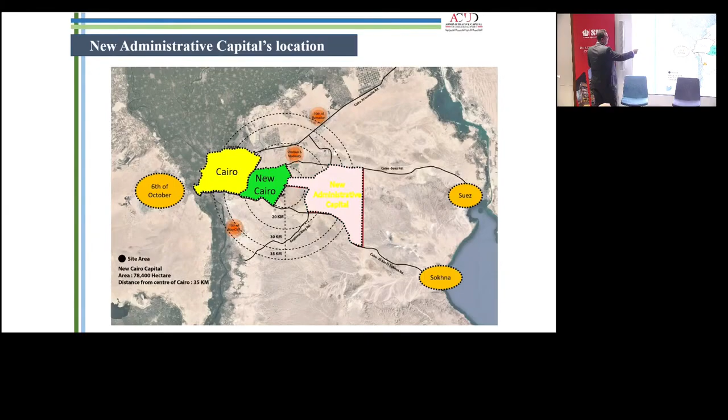So we are showing you the location of the new administrative capital, so you can imagine where it is. Again, the Nile, Cairo, and the green color showing New Cairo, a neighborhood related to Cairo, and after that the new administrative capital.

It's surrounded with a network of roads, so it's easy to connect and reach the new capital, going back and forth, and it's already connected with the rest of Egypt. This is one of the most important things: when you start a new urban development, you have to connect it with the rest of your country to move the mass of people, workers, and companies there.

Otherwise, you have to establish a network of roads, trains, monorails, and so on. So we can see it's connected with the rest of Egypt and Cairo. We have three ring roads around Cairo: this one, the other one, and the last one. We have the old one, and we have here what we call it.

Here we have a ring road, and another ring road here, which we call the middle ring road, and here we have what we call the regional ring road. So it's connected with the rest of Egypt.

What about the space? How much bigger is the new administrative capital? We are talking about, when we finish, by 2050, about 6 million people. We are suffering in Cairo—we have more than 12 or 13 million people living there. Hopefully we can move a massive number of these people to the new administrative capital, also from the rest of Egypt.

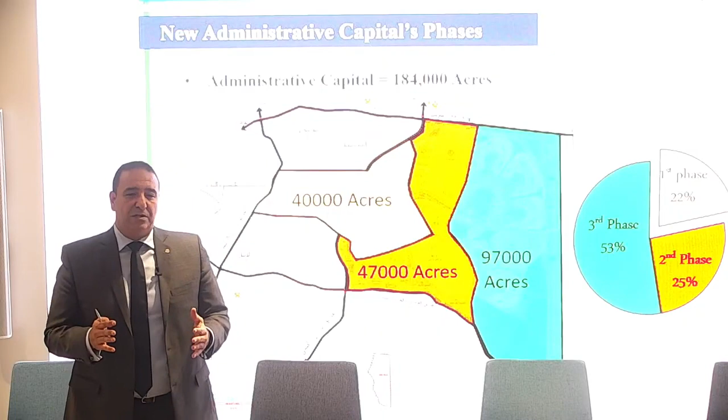In Egypt, we have almost 500,000 up to 600,000 marriages every year, and all of these need housing units. We need housing units, and this is also one of our reasons to establish this project.

Again, we have here the new Cairo neighborhood, the middle ring road, the regional ring road, and the new administrative capital.

When we talk with a consultant, of course we have a layout, engineers, and consultants in every field—electricity, water, general consulting. They advised us strongly that we had to divide the project, because we are talking about a total space of more than 700 square kilometers.

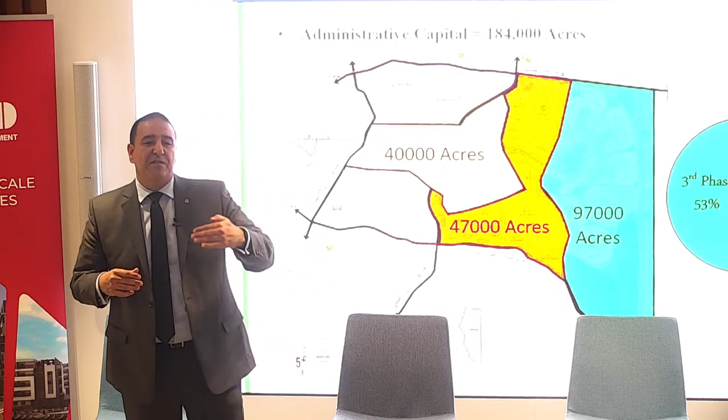In Egypt, some use acre or feddan as a measure. With acres, we are talking about more than 180,000 acres, equal to more than about 730 square kilometers. Actually, it's bigger than Singapore, for example.

So this is a very huge project. They advised us that we had to divide it into phases, because it's difficult to finance the whole project in one shot, and it's also difficult to start technically with this much space.

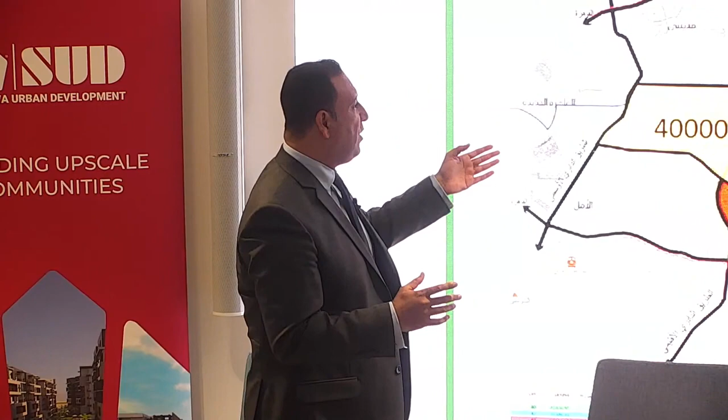So we divided our project. They also advised us to put some anchors in the first phase to attract all segments and make the project a success.

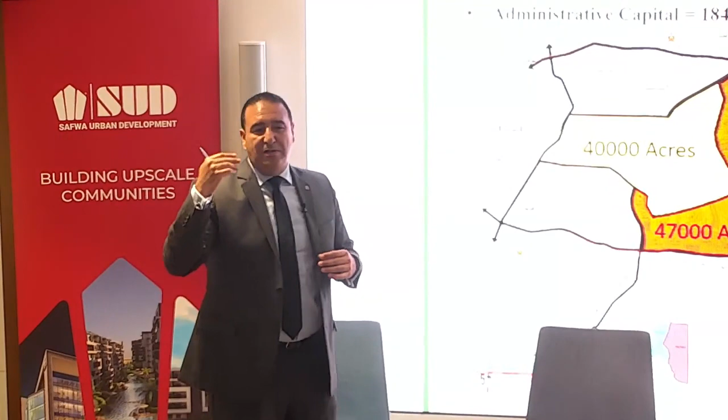You can attract a segment of residential, with people seeking housing units. You can attract companies. You can even attract people interested in culture and business.

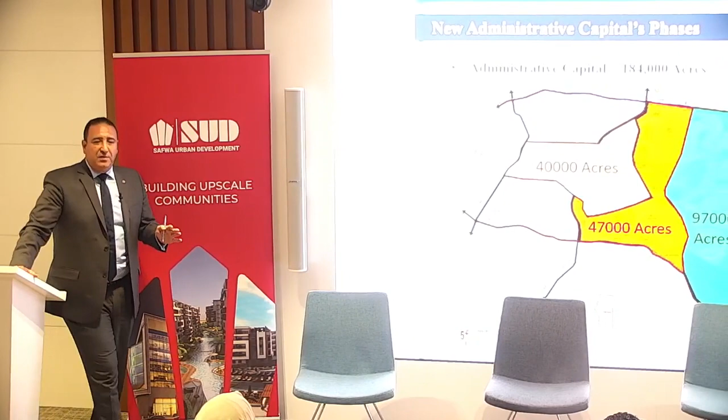Actually, the announcement about the new capital was in March 2015, and on the ground we started almost a year later, because we had a lot of studies to finish before starting. Now we're talking about 5 years—5 years on the ground, 5 years with 40,000 acres. It's a very huge space, and we believe we've achieved a lot.

And you can notice that when we finish our presentation and when you see the video.

We're talking about the connected project. We have here the Middle Ring Road, the New Cairo neighborhood with the 90th Road, and the Middle Ring Road and the Regional Ring Road, and Cairo Suez at the southern part is connected with Cairo Suez Road, Cairo Sokhna Road, and Cairo Suez, the red one. It means it's already connected.

It's near what we call Mustaqbal City, or Future City, and Madinaty. If you've been to Egypt before, you may know that. And it's almost connected with the old urban area.

Beside the roads, beside the network, the most important thing for us is to be connected with the rest of Egypt. We are working now through the Ministry of Transport with two means of transportation. It costs a lot, but we've already started and almost finished. We started with what we call the light train. We are dealing with the Chinese on this, and we'll almost finish by the end of this year, maybe the first quarter of next year.

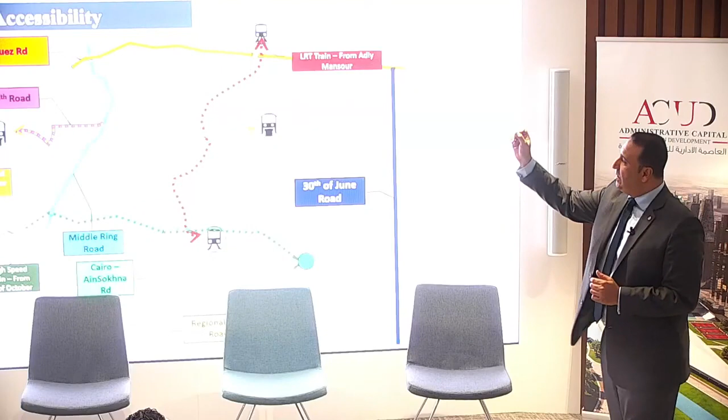Also, the third transportation means: we signed a contract with Siemens, the German company, to establish a fast train coming from a city called Ain Sokhna, located on the Red Sea east of Cairo, to connect east of Egypt, ending in Al-Alamein, located at the north coast. So we will connect the east of Egypt with the north of Egypt via the new administrative capital, which will be the third public means of transportation. So it's very connected with the rest of Egypt.

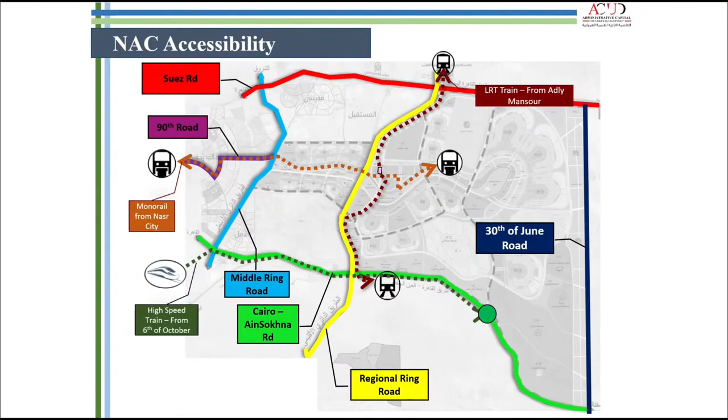This is just to show you that we already received the tracks of the monorail, and we have the routes here, beside the towers. By the end of this year we will finish the monorail and the light train.

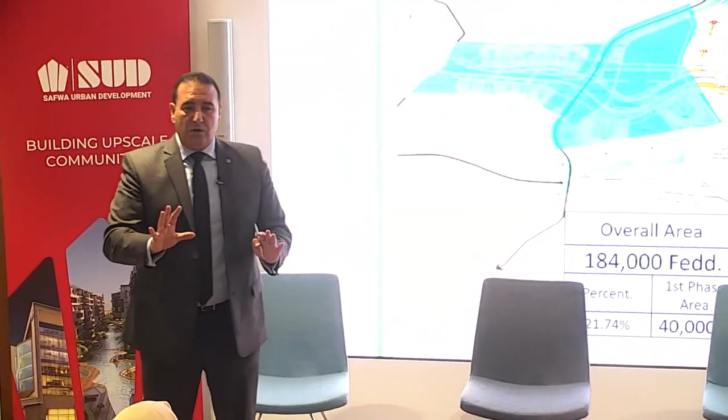Let's talk in depth about the first phase. When you hear something about the new administrative capital in Egypt, you have to know very well that we are talking about the first phase only, the 40,000 acres. We have the layout for the second and third phases, but we actually started with the first phase, beginning 5 years ago as I mentioned, and hopefully we can finish the first phase of 40,000 acres with a huge number of projects.

We have more than 400 projects in this huge space. We are doing something like a miracle. After 2 or 3 years, maybe by the end of 2025 or 2026, we will completely finish the first phase of 40,000 acres with these projects. After that, we intend to start the second phase, then the third phase, to offer Egyptian citizens, by the end of this project, 6 million opportunities to be in a new, urban, modern, and smart city.

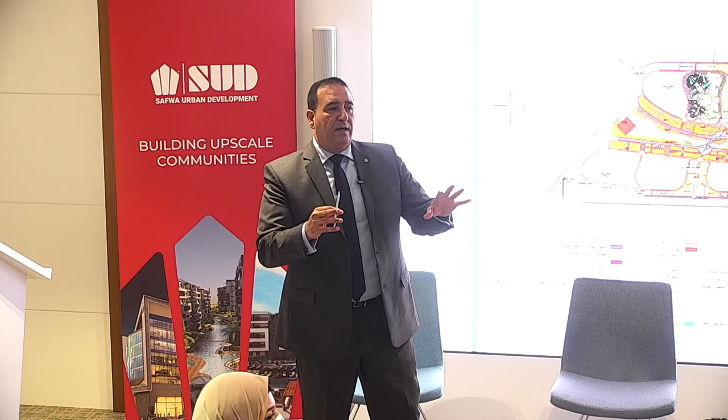Let's talk about the first phase. Do we still remember where the new capital is located? Located east of Cairo, east of Cairo again. You can still remember the map, east of Cairo. By the way, the distance between downtown Cairo, which we consider to be Tahrir Square, and the downtown of the new capital, is about...

...50 kilometers when measured on the map, but actually on the road it's about 70 kilometers. And the distance between the new capital and the eastern border of Egypt, meaning the Suez Canal and Gulf of Suez, is about 100 kilometers. So it's located between the economic zone in the Suez Canal and the ports and the Red Sea, and Cairo. As I mentioned, it's 50 or 70 kilometers by car from here to downtown Cairo, and 100 kilometers from the downtown new capital to the Gulf of Suez and Suez Canal.

Remember the location, this is the layout for the first phase. We have 3 phases, and we started with the first phase 5 years ago. It will take about 3 or 4 more years to finish the first phase.

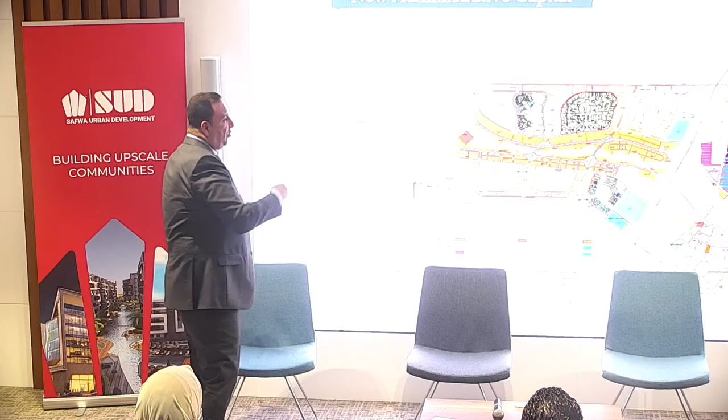We have a layout, but of course we didn't make this ourselves. We have an engineering consultant, and we are dealing with the best, for example Dar al Handasa, a worldwide consultant. We have many consultants, and we pay a lot for them, just for unique design and smart solutions for everything, electricity, water, sewage, and even the design itself.

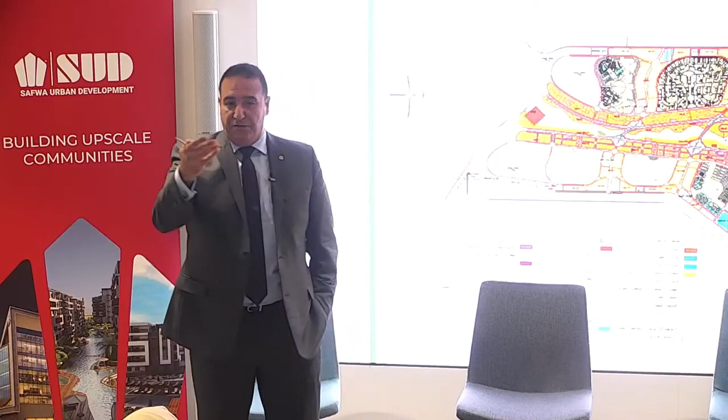For the first time in Egypt, we started many new steps in the new administration. For the first time, we are talking about 25% as a footprint. I mean, if you asked me for a plot of 1,000 square meters, you would not be able to build more than 250 square meters, because we don't need a jungle of cement. We need a new urban environment, unique and full of landscape, streets, and surfaces.

So let's talk about the first phase layout. We have the layout, and we are doing what the layout says. For example, in this layout we can see again the middle ring road, the regional ring road, and the layout itself. We have the yellow color here.

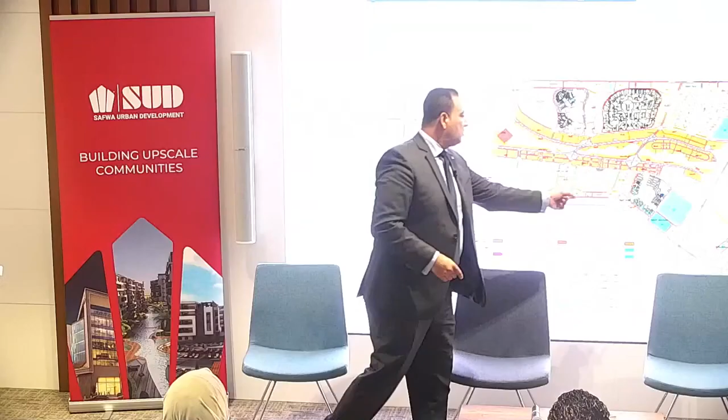The yellow color, except for this one, represents residential districts. When we finish the whole project, we expect to accommodate 6.5 million Egyptian citizens in this area. For the first phase, we are talking about 1.5 up to 2 million, according to the number of housing units in the first phase.

Don't forget, this is the smallest phase, but the most unique phase, full of anchors to be successful and able to attract all segments, as I mentioned. So we have our residential districts, this one and this one, forget the color, and we have this and this. The yellow colors are R1 or Residential 1, R2, R3, R4, R5, R6, R7, and R8.

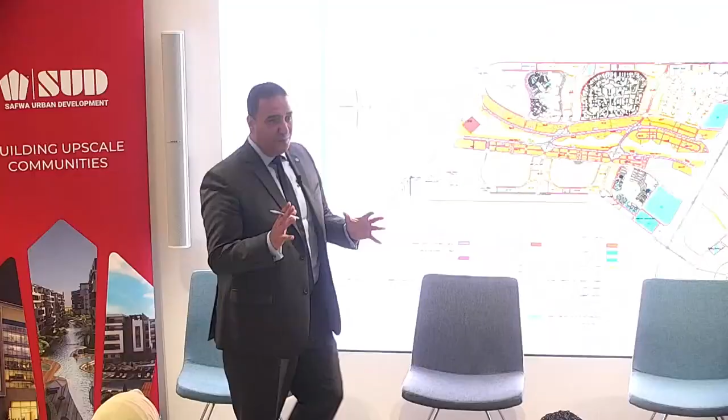To be honest, to finish this project with this space, the government will not be able to finish it in this time. For this reason, we have our own policy. This policy says that we are not dealing with persons, we are dealing only with companies.

Because we have another authority in Egypt, it's called the New Urban Authority, related to housing, the Ministry of Housing. They can sell land to persons, 600 meters, 1,000 meters, depending on the case.

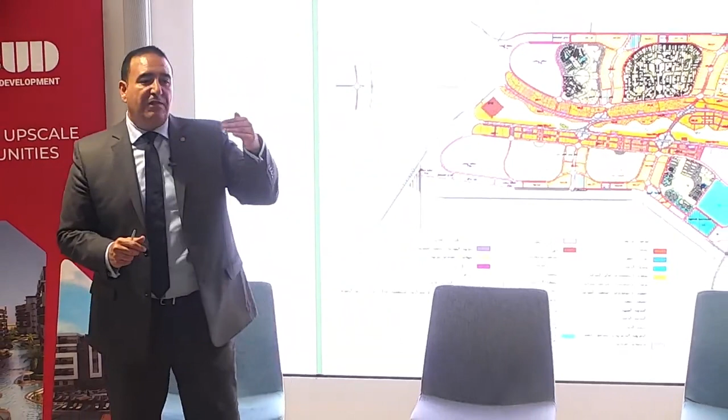But in the new administration, we don't like this, and we are not doing this, because if we start selling this land to people in small plots across 40,000 acres, we will not finish our project. So we are dealing only with companies, and we have a minimum space for the residential area, for example 20 acres, 25 acres, depending on the case, but with this minimum space.

To be honest, as I mentioned, we gave the land for this one and this one, R7 and R8, to the private sector. The whole area located east of the regional ring road is developed by the private sector, and west of the regional ring road is developed by the government.

We have housing units, and they started. Also, we have the army involved. To be clear, we have the army. When we established this company, ACUD, Administrative Capital for Urban Development, that's the name of our company, we needed shareholders. The shareholders for this company are the army and the Ministry of Housing.

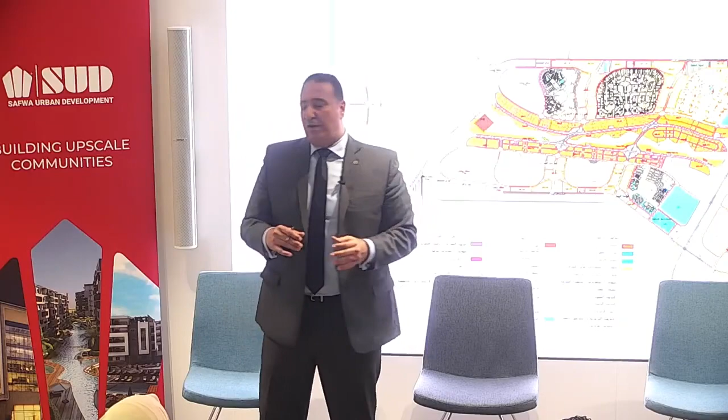Why the army? Because originally this land is full of military units, as it's outside Cairo in the desert. So our shareholders are the army and the Ministry of Housing. The Ministry of Housing are specialists, of course, and they can open this up easily. And so we started this project.

So this area is developed by the government, whether army or Ministry of Housing, and this area is developed by the private sector. As I mentioned, we have residential units and residential districts, some with a small space for residential area and some with a big space for residential area, just to imagine how much bigger it is.

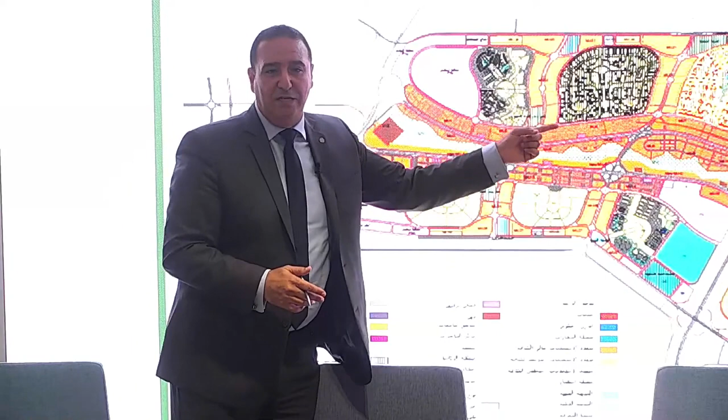Okay, let's talk about R3, for example. It's a moderate or medium size residential area, with a total space of 1,100 acres. It consists of 25,000 housing units and can accommodate more than 100,000 people in this area. This is the medium size, a moderate one, so you can imagine the bigger and the smaller in the same space. So by the way, we finished R3, and now start to sell the housing units for the citizens.

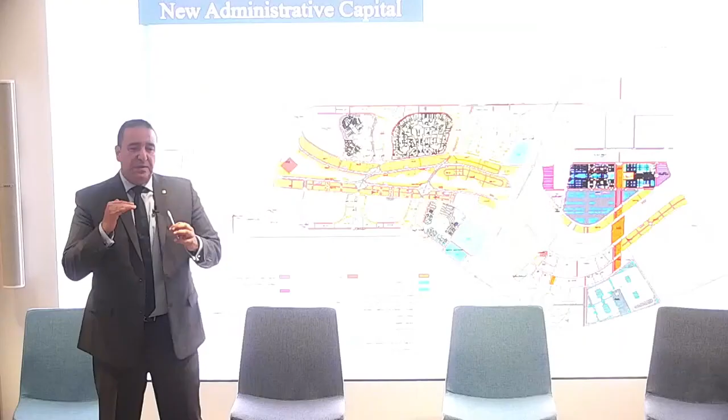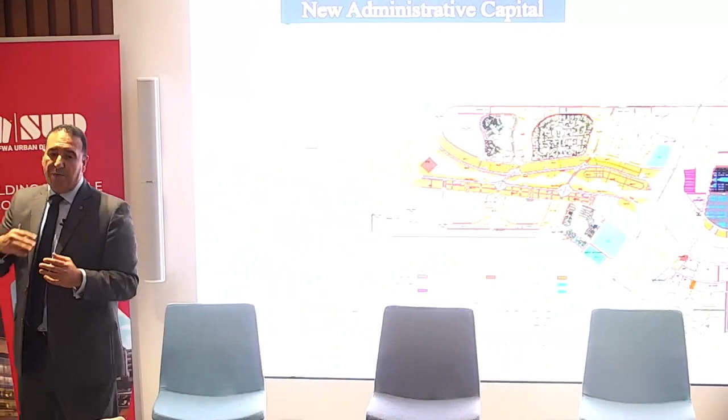Our policy in every residential district is that the housing units should not be the same. We need a variety. We have studios, small apartments, bigger ones, medium ones, villas, twin houses, townhouses. This shape, this type of housing unit, reflects on the price. And when you reflect this type on the prices, you can attract different segments.

I mean, we don't need this new capital just for rich people. This is always what people say in Egypt, that it's just for the rich. No, we are doing our best to make it available for most Egyptian people, but we cannot support any housing unit for any citizen who cannot pay. To be honest, if you cannot pay in the new administrative capital, you will not live there.

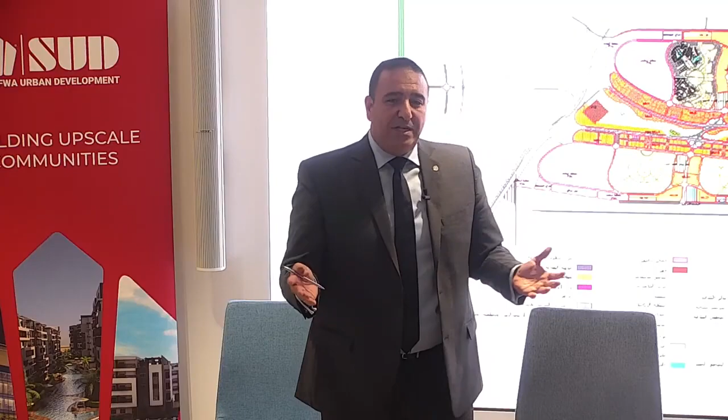Because I'm spending more than 70 or 80 billion US dollars with my policy, with my way, in the new administrative capital. It's totally away from the annual budget of the government. We didn't receive any penny from the government. We spoke with Mr. President to support the project, and he said, I will not support this project.

He said, I have my own pursuit as a state. We are seeking better education. We are seeking better health for the Egyptian citizen. We are seeking better transportation, better everything, but not for new urban development.

I will give you the land. I will make you the owner of the land, according to the authority I have, and you have to create your policy to develop this, to market this, to drag and attract investors here in Egypt and outside. Just invite them to invest and make the investment smooth in the new capital. You can earn a lot of money, and you can spend this money mainly on the infrastructure and the utilities.

And why utilities and infrastructure? This is our policy also, in Egypt. For example, the new administrative capital, we have the land, we have the design, and we have the layout, everything. We will start to sell, for example, this one, R4.

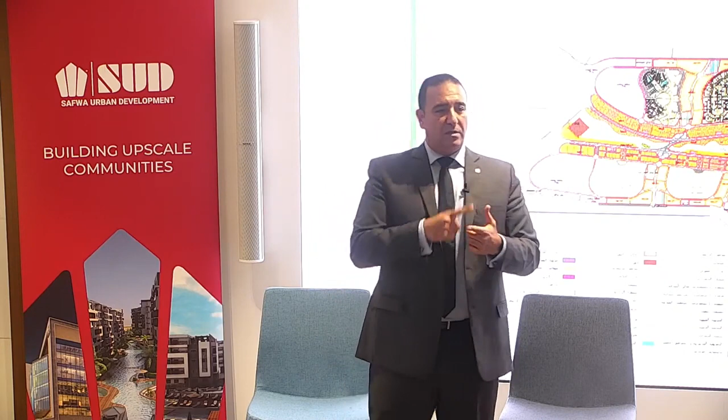We will design it and make many plots with many surfaces, and invite investors: come to us and buy here, make your investment here, make your compound, make your commercial project here. Our responsibility is to give you the land with your borders and supply your land with the utilities. I give a pipe of water, pipe of sewage, irrigation water, electricity cable, also the smart infrastructure, gas, everything, and the roads.

Once you receive your plot within a specific frame time, it's mentioned in the contract, along with the payment terms and the engineering terms. You have the level of height, G plus 7, G plus 50, G plus 100, depending on the location. You have the basement, you have the borders here and there. You have the footprint, which must not exceed 25%.

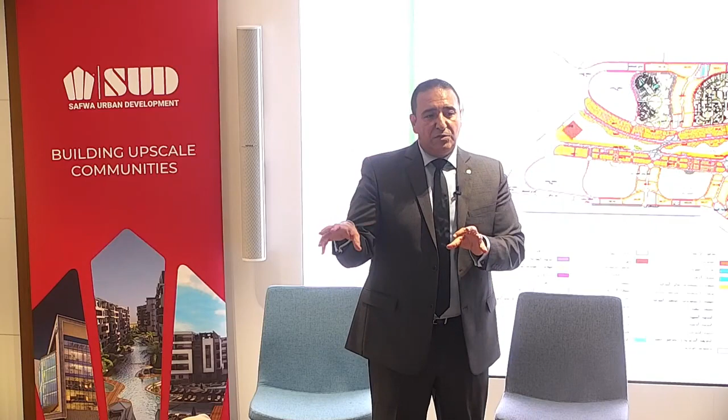This is the engineering terms. You also have the payment terms, meaning you have to pay us through installments. Also, when you sign the contract and receive the plot, you have a frame time, and I will supply your land with the utilities and the internal utilities.

This is your responsibility: you will establish your building, your project, and make the internal utilities. So basically, we are paying for the utilities to finish the whole land.

So again, regarding the layout of the first priority, the first 40,000 acres, we have a residential district which can occupy about 2 million people. We also have government districts, one of our anchors, the government district.

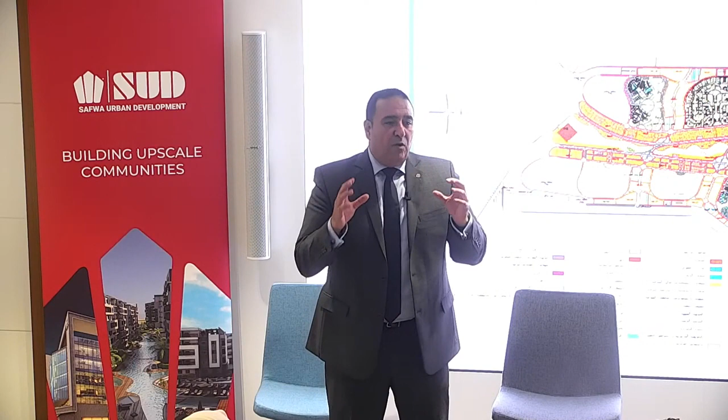What's the meaning of government district? In Egypt, we have the ministers' buildings everywhere, in every neighborhood. We decided to gather all the ministers with the cabinet in one area. This area is about 1,000 acres. We will gather all the governmental authorities or ministers. We almost finished, with a ratio of more than 95%.

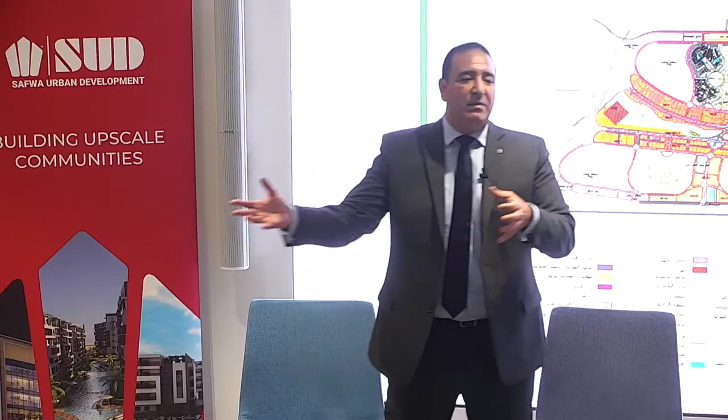35 buildings for the ministers and the government authorities. The cabinet building for Mr. Prime Minister, the new parliament building. We will move the parliament from the old place in Tahrir Square to the new administrative capital. Also, according to the last amendment of the constitution, we established a Senate, and the Senate will be next to the parliament.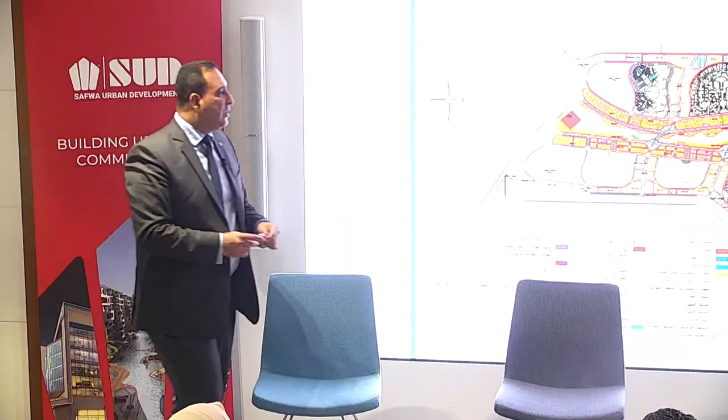This is what we call the government district here, with the parliament and the Senate. We have a government district beside the residential district. We have a residential complex here, and we've almost finished 60 or 70% of the works, because Mr. President said, finish your project and I will move to the new capital. So after 1 or 2 years, you will find Mr. President and the whole government of Egypt, the whole state, in the new administrative capital.

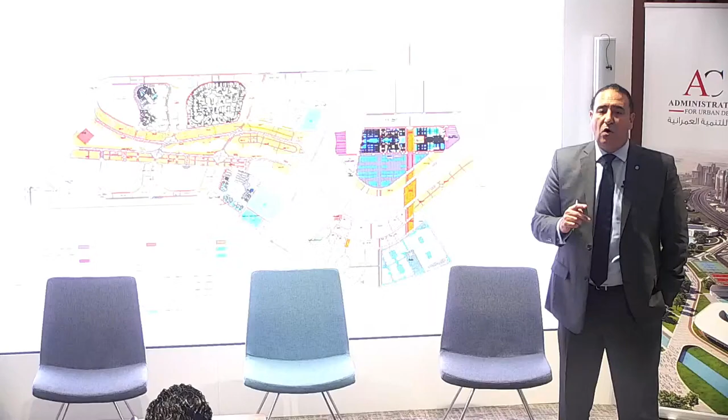And this is what we're calling anchors. Also, we have here a huge resort, and we have a cultural city here with a unique opera house, the largest opera house in the Middle East, maybe the second in the world, with a capacity of about 3,000 chairs.

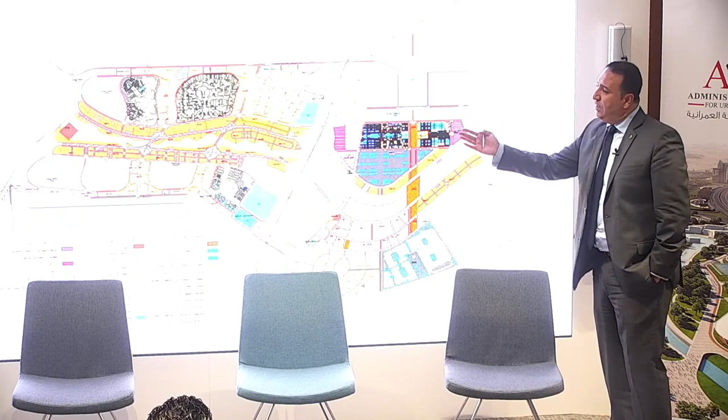With the latest technology in the cultural city. We have a museum for the capitals in Egypt, starting from ancient Egypt till now. It's a great museum with original pieces. Also, we have theaters, opera houses, landscape and open theaters and everything. So it's also an anchor. If you care about arts and culture, you can find art and culture here.

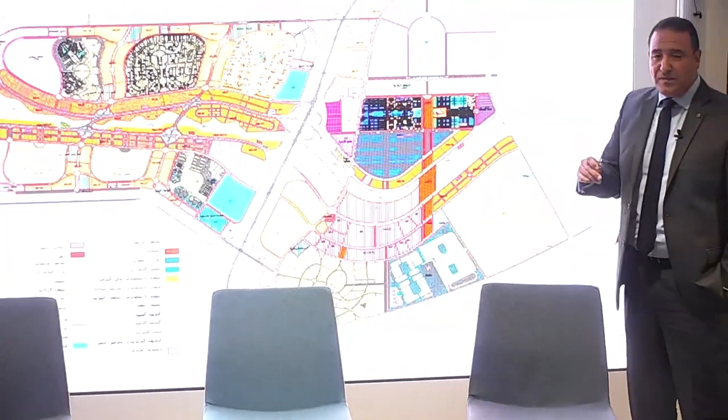And here we also have what we call the diplomatic district, one of our anchors. We spoke with many embassies and diplomatic missions in Cairo, and officially we've received more than 60 official requests from embassies to move to the new capital. Of course they will leave their places in Cairo and move to the new capital because they know this is a smart city, and a safe city. It's next to the Ministry of Foreign Affairs, which they need, and next to Mr. President, and you can find new urban development and new technology in the new administrative capital. So this is the diplomatic district, and it will be unique.

Next. Sorry, back again. Also one of our anchors, we have here what we call the Central Business District. It's a plot with a 200-acre space, including 20 towers. Yesterday we visited Burj Khalifa - it's amazing. But we are doing half of Burj Khalifa, don't forget, in the new administrative capital. We have 20 towers here.

It's a hub of business, actually - mixed use business, hotel and residential area, like any towers. 20 towers with a cost of about $3.5 billion US dollars. And we paid this money, and we have the iconic tower in the middle with a height of about 400 meters.

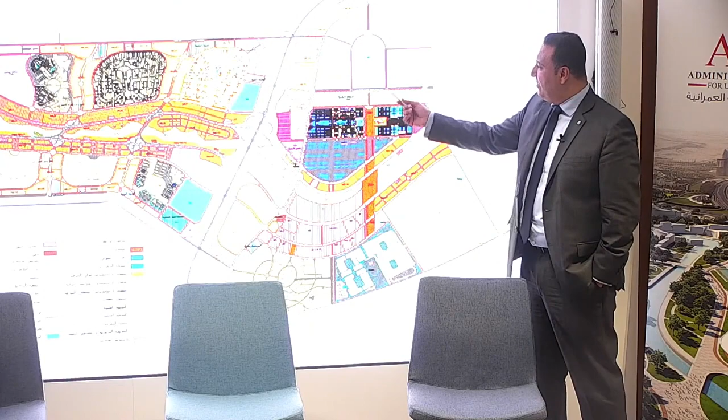Also, by the way, we have here a people's park - an open park for the people. It's next to Mr. President, just so he can feel with the people and talk with the people, as Mr. President says. And we have here what we call People's Square, which includes the highest flag in the world. We started and we've almost finished, within a few months, with a height of more than 190 meters. It will be the highest flag in the world, and the highest tower in Africa, not the world, because of Burj Khalifa.

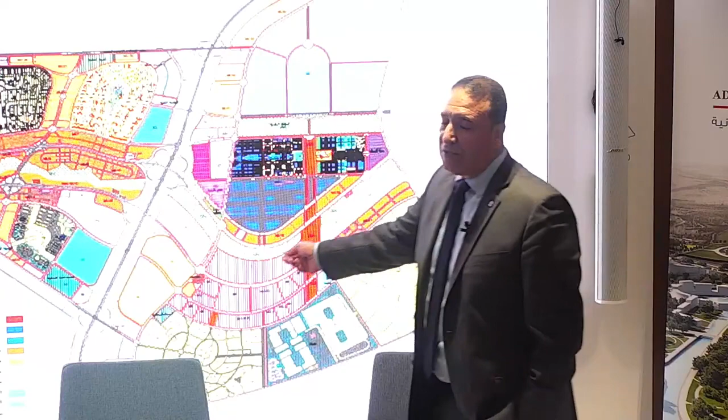We are establishing now an Expo City like this, but of course we need to start when they finish, so hopefully it will be better. And we have a lot of opportunities, of course medical city, and so we will talk about the opportunities later. Next.

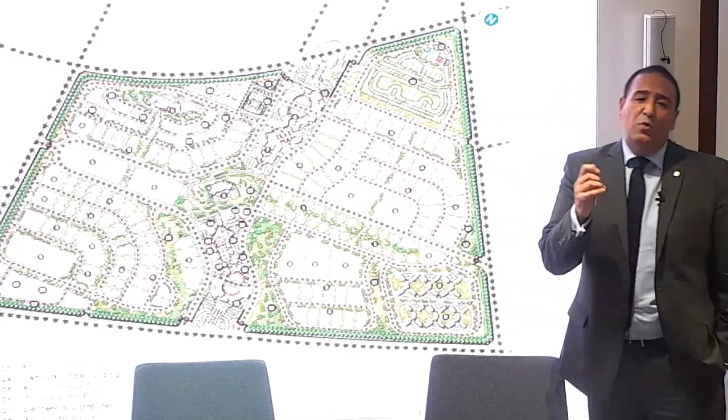We are seeking to be like New York or Vienna. This is our dream, and we are pretty sure we will reach it. We will start with a huge building for the United Nations, which supports our mission to attract the rest of the embassies and diplomatic missions to be beside them. We also spoke with the Arab League, and one of their departments will be here with the African Union. We are doing our best to attract most international organizations to the diplomatic sector - it will be amazing.

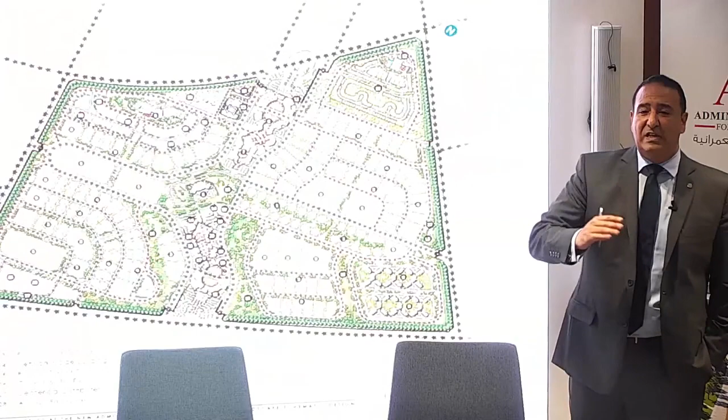We have more than 6,000 cameras and sensors and smart poles in this area, and people are very happy with this because smart city always means safe city, and you are facilitating life for the people.

For example, we started this project from scratch, so you can imagine this better. When you see the video, you feel the difference. This is the villas for the diplomats in the diplomatic district.

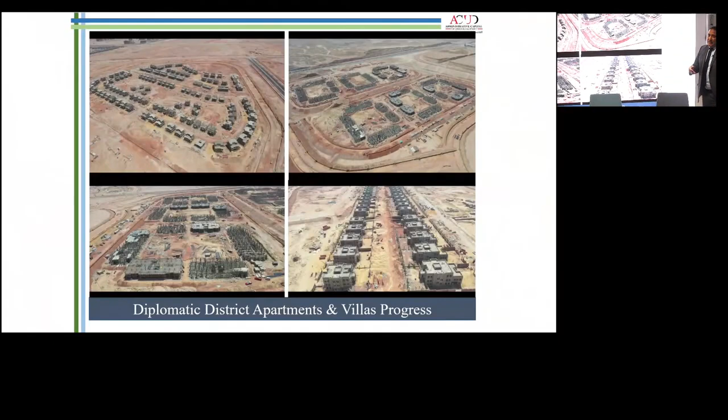We are building now a church according to Latin Catholic, because we have many types of Christian people. We spoke with a Pope, and he advised us - we gave him the land for free, and they are now building it. We also have a lot of international schools, the French school and English school.

Of course, we are seeking a sustainable community with clean energy. It's obligation in the new administrative capital to cover 50% of the roof with solar cell sheets. Hopefully we can produce about 17 to 20 percent of the whole power needs in the new administrative capital through clean, renewable energy, and we plan to increase this ratio later. It's an obligation for the private sector, and even for the government sector - this is the government district - it's not optional.

This is another type of presentation. Next we will talk about the investment opportunities. Again, we still remember the layout of the 40,000 acres.

Residential area - it's blinking already. 2 million people will live here. Next, the government district: the presidential complex where Mr. President will live, and the government. We will gather the government here. By the way, we expect to finish the government district by the end of this year.

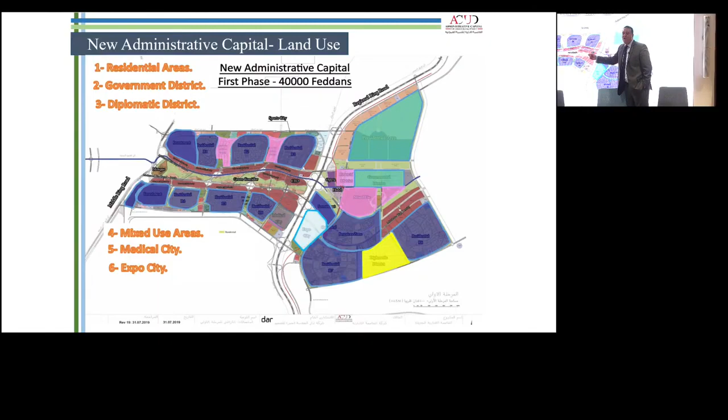Between the main horizontal routes, we are establishing what we call the Green River, inspired from the Nile. We are establishing a lung for this city. It will be, inshallah, bigger than Hyde Park, bigger than Central Park in New York, with a width between 500 meters up to 1 kilometer and a length of more than 30 kilometers. We started with the first phase, located between the Middle Ring Road and Regional Ring Road, with a 1,000 acre space.

Residential area starting from 25 feddan or acres. A feddan is almost an acre, which is 4,200 square meters. Average price between 4,100 Egyptian pounds up to 5,500 Egyptian pounds per square meter, which equals about $300 US per square meter.

We started selling the land at half price because we started from scratch, without any landmarks you could see. As an investor story, we have one of our investors we fully trust. He is still with us because if there was trouble or delay he would not be here. When we invited this investor, there was nothing to see, nothing to show. We just promised him: be with us and you will succeed, you will earn money and find something unique, but there was nothing visible yet.

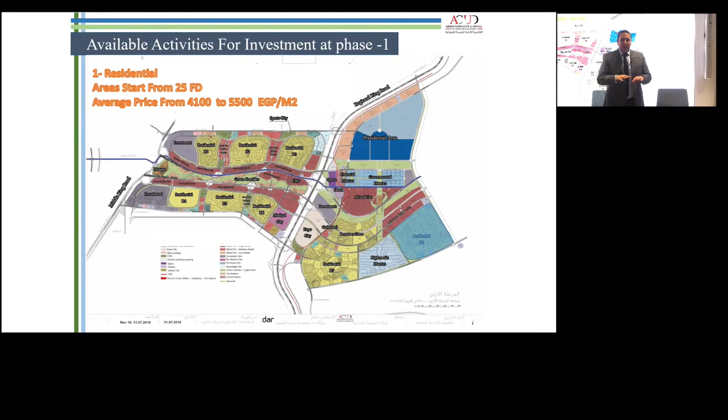We started with a half price, and after 5 years we doubled the price. We started, for example, with 150 US dollars per square meter, and now we are talking about 300 US dollars per square meter for residential plots, since we are selling land only, supplied with utilities. For commercial or administrative projects, the price is higher because the profit margin is greater than for residential areas.

Universities. To develop this community and offer services for the people, you need schools, universities, hospitals, workshops, everything in this community. For this reason we planned for 11 universities in the first phase. We signed contracts with 7 of them.

They finished construction because we gave them the plots. We have Coventry University, a British one, a University of Canada, GIU or German International University, and a global university. We have all international universities with unique certificates and scholarships tied to their origin or mother university in their home countries. The average land plot is 37 up to 55 acres, priced at 4,000 Egyptian pounds, which equals about $250 US.

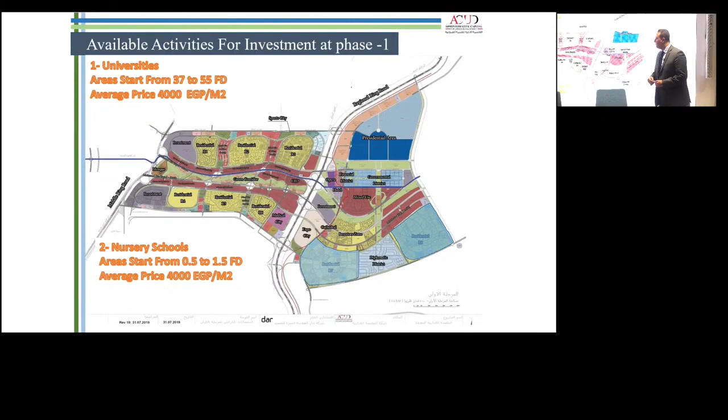Nursery schools, from 0.5 to 1.5 feddans, with a price of 4,000 Egyptian pounds per square meter.

Mixed use areas, from 0.5 up to 6 acres, with the higher prices here, from 14,500 up to 50,000 Egyptian pounds. At 50,000 Egyptian pounds, we're talking about more than $3,000 US per square meter, because the profit or revenue is higher here.

Administrative use, with its own average and prices. Medical use area, starting from 2.5 up to 45 acres, with a price of 5,000 Egyptian pounds, almost 350 US dollars.

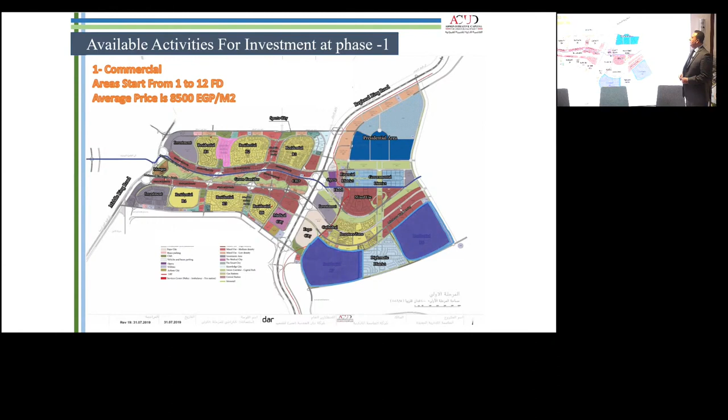Gas stations, we need services in this urban area, so we have a lot of gas stations, and the prices are set for investment opportunities. Also commercial space available, showrooms, and clubs should all be there.

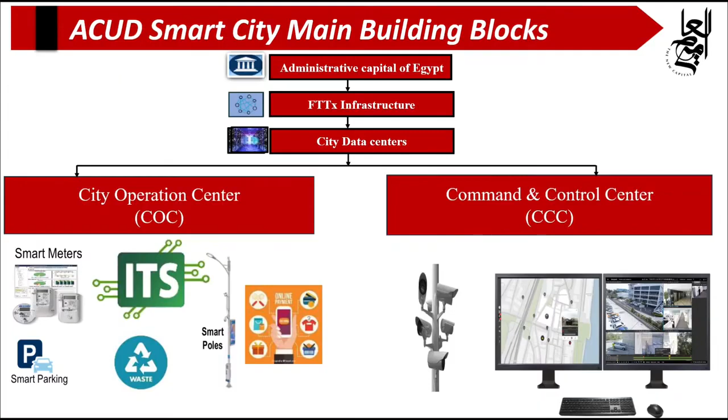Under this we host two big centers. One is the city operation center, related to utility management like smart meters, ITS, smart pole management, waste management, smart parking, and it's also controlling our citizen engagement platform, the app and our portal used by the citizen.

Our citizen will have a portal with an ACUD ID that lets him request services and follow up on everything - even show the status of transportation, the status of meters, and bills from there. And the command and control center, CCC.

What's the CCC? It's the command and control center. This is what we talk about - it's a safe city. Safe city is what we need, everyone safe in the streets.

We'll have about 6,000 cameras distributed across the 40,000 acres in a way that there's no blind area between each camera, fulfilling video surveillance. This is the design of the triple height hall for the operators who will work in this center.

The center contains 3 big halls: one for video operators, one for CAD - computer-aided dispatching, and one for call takers who handle problems. This is managed by the MOI, Ministry of Interior, the police. These police agents have had very good training on the systems.

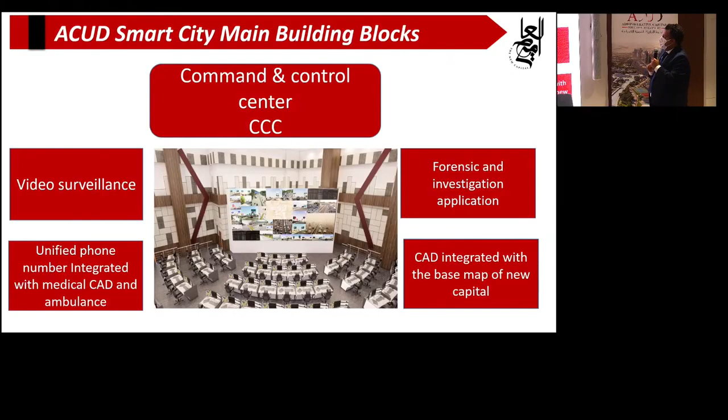Let's go for next. The COC is the City Operations Center. This is related to citizens in a direct way. As I told you, this is a utility management platform. The platform is used for the gas meter, the water meter, and the electrical meter, all provided by us, by ACUD, to be compatible with our platform. Our platform of the COC is a unified one through all the city. This one can manage the utility.

If I show my subscription to this service, I can see how much I already consumed, food or gas, and if there is any problem in the bill, I can add alarms on my account on the citizen engagement platform, as I told you, the web portal or the mobile app. Also in the COC, the City Operations Center, we have automatic accounting system, unified payment, and access card for ACUD residents.

In ACUD, we have an idea to use one unified card. One unified card used to access and to payment also. We have two chips inside. It's used to access the doors in a way to make more safety, and also to be used for the citizens of ACUD, the new capital. If he uses it during or in the border of ACUD or the new capital, he gets points, loyalty points, like this. So for the unified card of the city, we have both access control and payment.

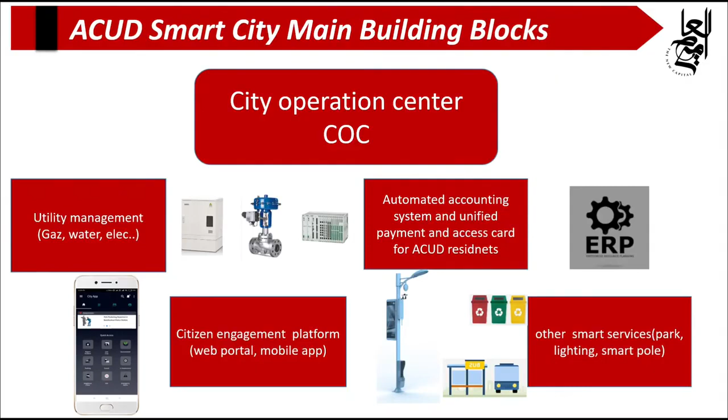Okay, next please. Okay again, how can I host all this data? I host it on my data center. My data center is on the basement in the COC building. I have more than 8 halls ready to be used, and more than maybe 300 racks already delivered, to be used to host my applications. As I mentioned, all my applications will be hosted in the COC platform and the triple C platform in the other halls.

This will have many advantages. First, it's safe for me from the cybersecurity issue, and the access control is managed by me, the surveillance is managed by me. Everything is under control, so we can host our data safely in this data center. Also all the world now is talking about data centers and big data, so we are going with the whole world, and maybe we'll try to go further.

Also, to maintain our building and keep it really a better market for this, we took the Uptime Institute Tier 3 certification. This certification is related to the mechanical, electrical, and plumbing in the building. If this is certified, big entities in the IT market, ICT market, cannot host in such a data center without this certificate. If you use this certificate, okay, you can host with us, and this will profit us. If you host and rent from me my resources, this will be ROI also from our perspective.

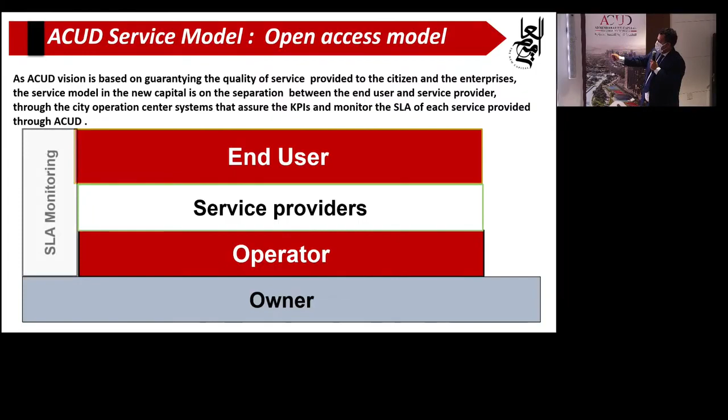Okay again, so this is my way - SLA monitoring, and again, the KPI monitoring. This will be provided by my platform and my systems.

Okay, again, next. Okay, this is our start of the journey, and we continue.

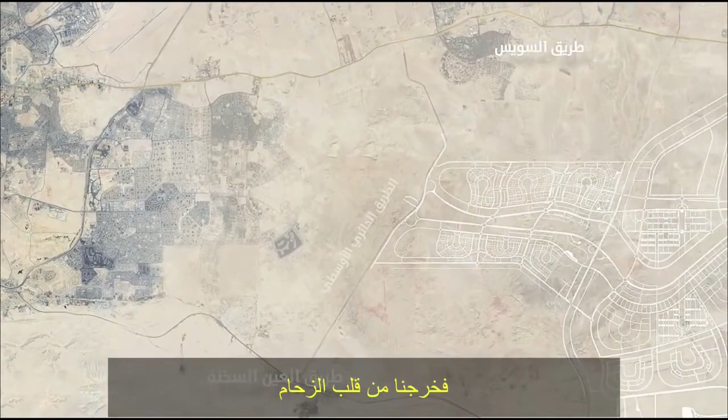But time passes, and the beauty of Cairo began to disappear due to overpopulation and urban encroachment. Therefore, a solution to the problems was thought of before the disappearance of Cairo and its beauty. Egypt is much larger than the area inhabited by the whole population, so it was directed to extend a new artery and new land to increase the area of urban construction to become the new administrative capital.

The capital was planned on an area of 174,000 feddans, which can accommodate up to 6.5 million people, with a strategic location close to the cities of the Canal. 40% of the city is dedicated to residential buildings, with a percentage of 15 square meters of green areas per capita. 70% of the roofs are covered with solar cells, and 30% of the city's area serves the business sector.

40% of the road network has been allocated for pedestrians and cyclists, in addition to different transportation means for various categories. The entire city is covered with a global information network.

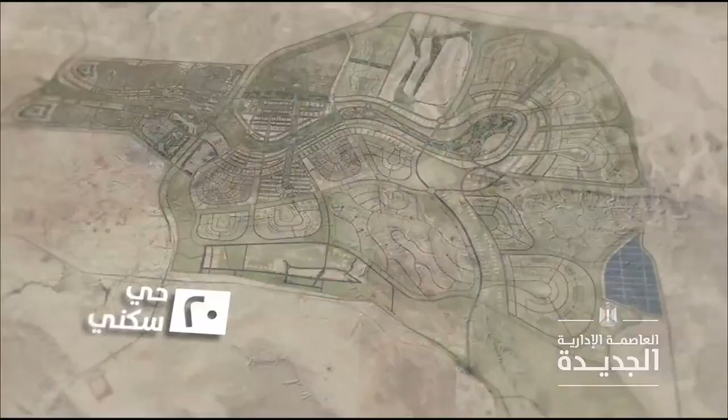20 residential districts have varied population densities to include housing for all categories, the first phase of which began with 40,000 feddans, covering the Culture and Arts City, the Central Business District, Embassies District, the Green River, and the airport.

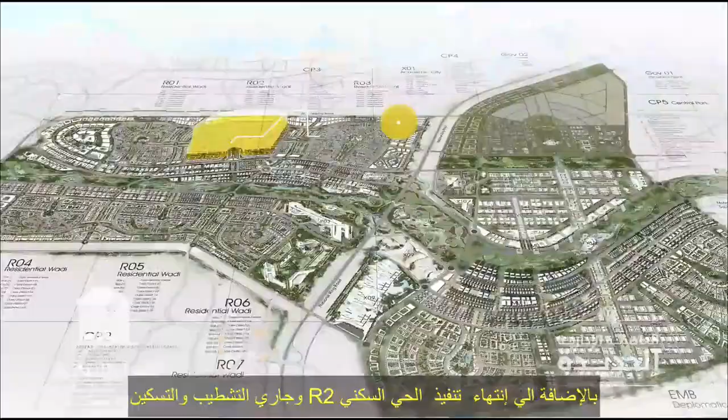The first residential neighborhood of 1,000 acres was completed, including about 25,000 housing units being constructed, with accommodations for every Egyptian, as the full facilities contain public services. The residential neighborhood of R2 has been constructed and finishing work is underway.

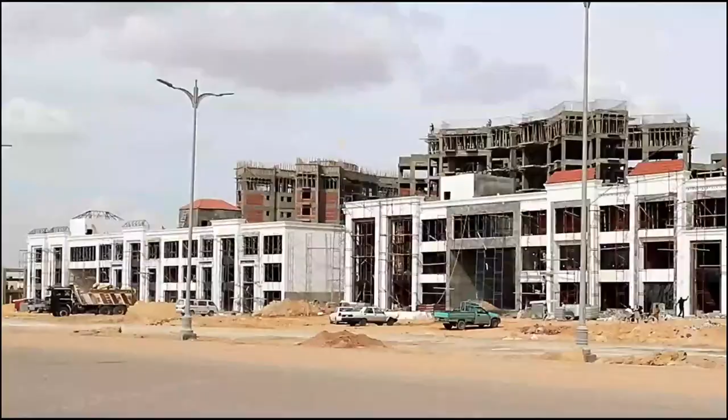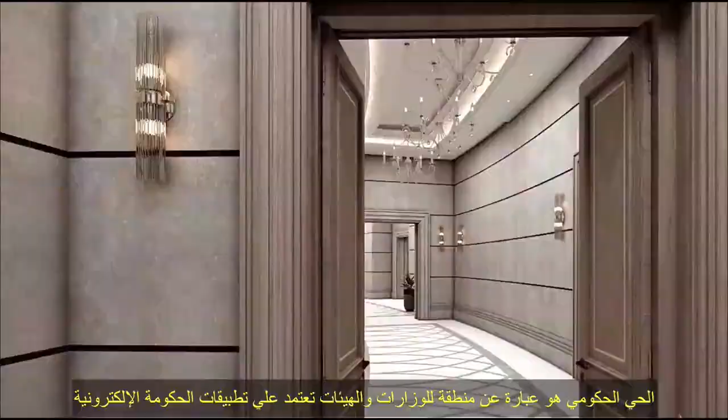The governmental district, the ministries, and the government agencies area, where e-government applications are implemented to raise efficiency and cover all governmental transactions. The governmental district consists of 34 buildings for the ministries and governmental agencies, the cabinet premises, and the Parliament headquarters.

A huge cooling station is also under construction to serve all the governmental districts.

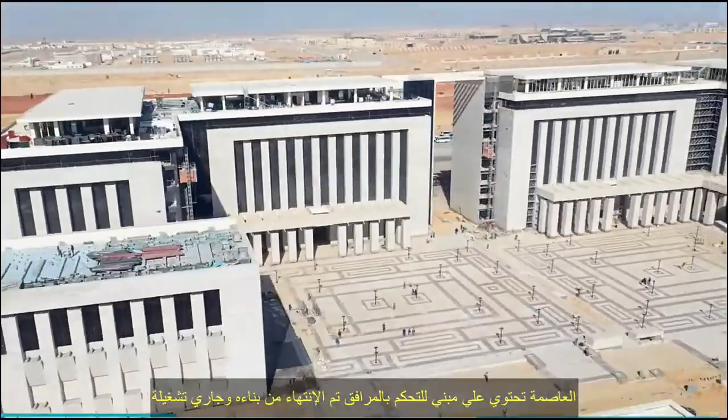The capital is equipped with a command operation center to control the utilities, and for more security, a command control center is now being built within the governmental district. The new administrative capital contains 6 network centers, linking the capital's networks with the neighboring governorates. Network Center 1 is now built.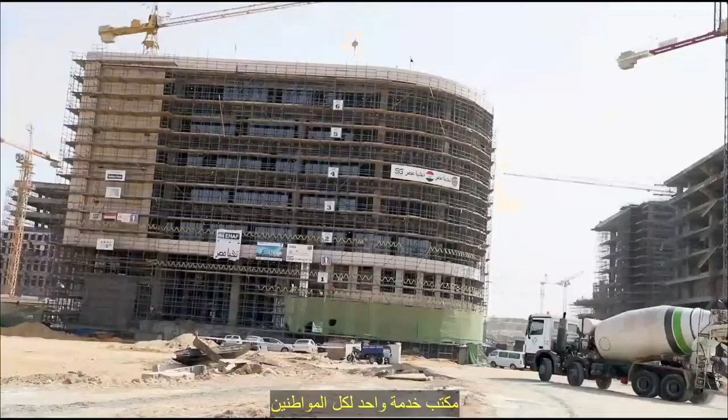The architectural design of the capital depends on the spirit of modern times and the authenticity of the past. One office for all citizens. The City of Culture and Arts has been developed to include the Opera House and the World Tourist Area for every art enthusiast in the world. It also has theaters and cinemas.

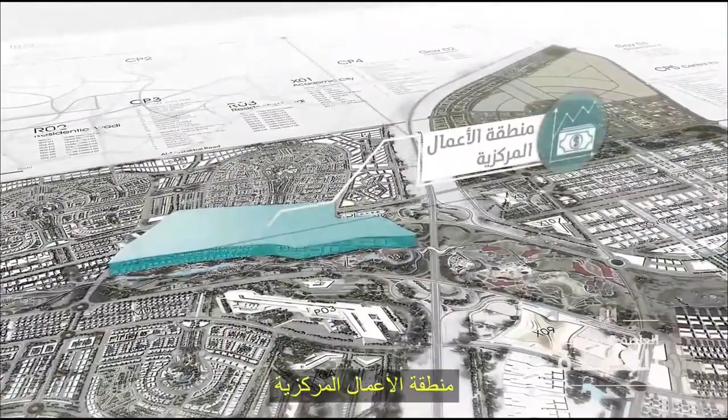The Central Business District, which includes 20 towers, with the highest tower in Africa, has been launched.

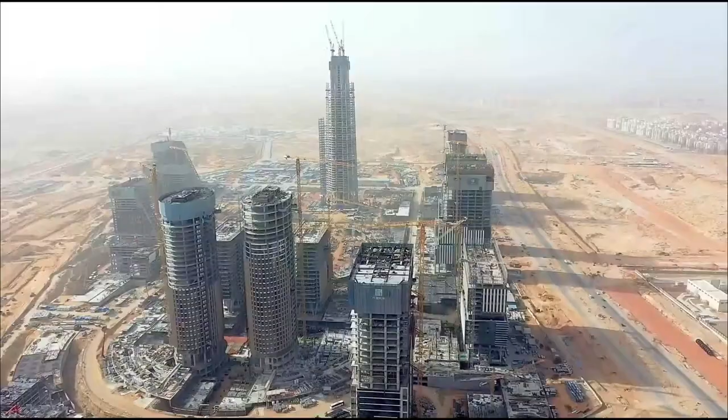The Green River, a river of trees branching around the capital with a spectacular view, gives it a clean, exhaust-free environment.

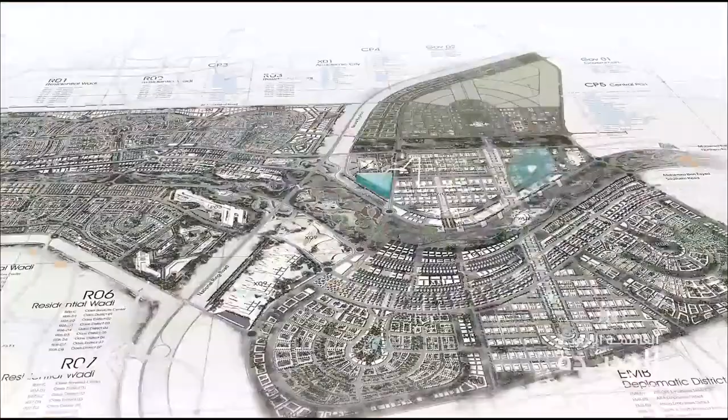Masa Hotel, built on an area of 10 acres, was also inaugurated as the first project in the capital. It has a tourist resort, an artificial lake, a conference hall, a mosque, and a large mall.

A group of international universities is being set up, and the first university at the capital has been inaugurated.

The main road network is connected to a network of 650 kilometers of main roads, providing extensive roads designed to accommodate the population density inside the capital and avoid traffic congestion.

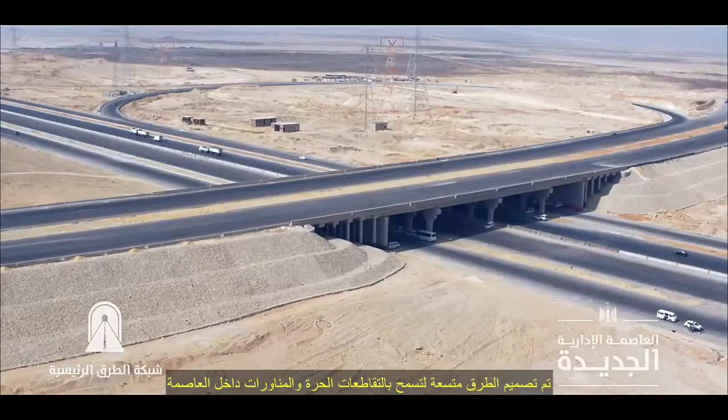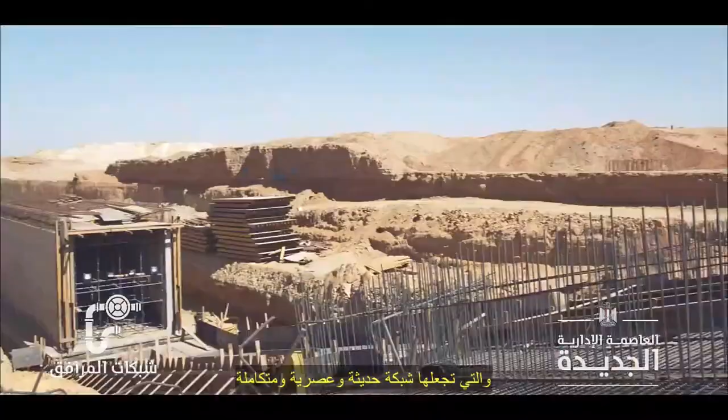Facilities networks established with the latest global technologies to be modern and integrated with the facilities of water, electricity, and communications within tunnels, to facilitate the maintenance process at any time without drilling or disturbance.

Siemens. The power plant, centered by the German company Siemens. The first station in Egypt and the Middle East to be established with the latest air cooling systems, using 12 giant fans.

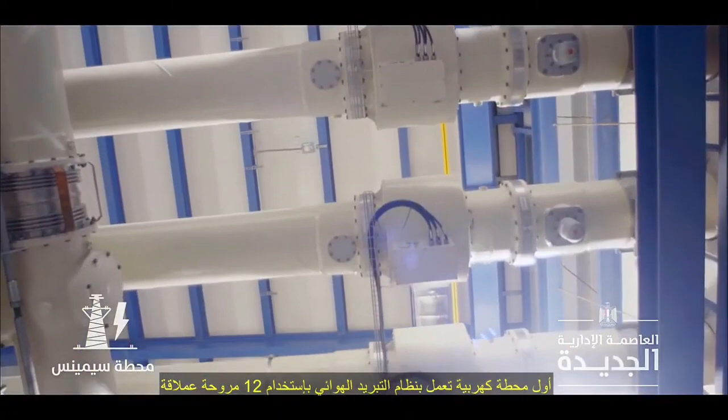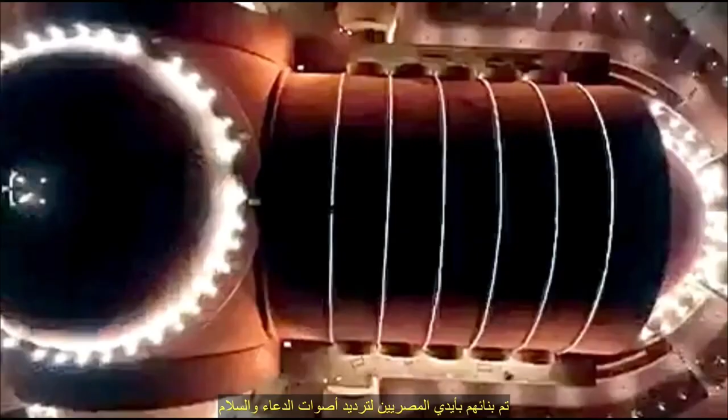The mosque and the cathedral, built and finished by Egyptian hands, to echo the voices of prayer and peace. More than 2 million Egyptian workers are building a new world, aiming at developing Egypt and its citizens.

Every hour and every minute in the capital, a part of what has been planned is accomplished. It turns from dream to reality, to witness the dreams of the great Egyptians. The new administrative capital, the future of Egypt.

As government, we are not able to cover the whole area, especially with the second and third stage, so we need the private sector with us. And we chose for our first session here in the Expo, the first mission, first delegation coming from Egypt, the most unique symbol for the investors. We have a lot of investors. As I mentioned, we have more than 400 projects working on this, meaning more than 400 investors. And we intend to finish this project with a partnership, almost 50% of the works by the private sector. One of the brightest symbols of our investor companies is called Safwa. We have Rami here representing Safwa on behalf of, and I invite him to be here, my colleague.